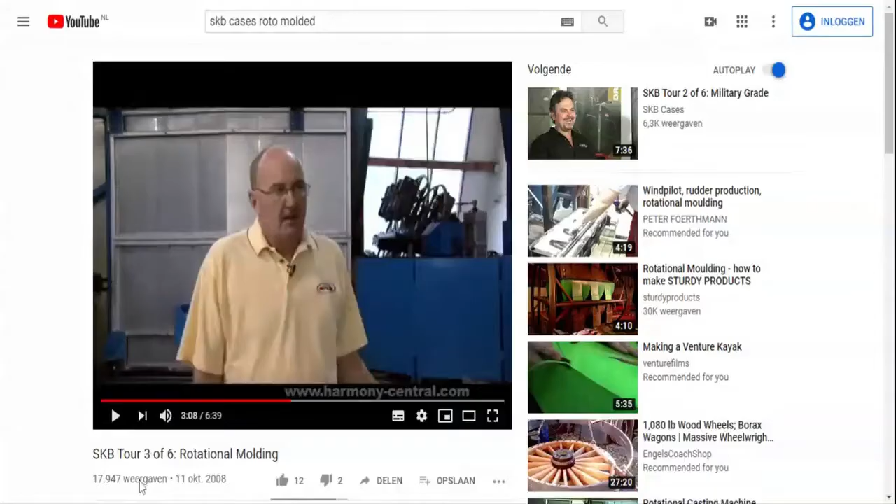So first let's take a look at roto molding. I'll try something new this webinar and incorporate a small YouTube video made by Dave Sanderson, also known as Big Dave, from SKB cases in the US, where he explains the roto molding process quite briefly. Just a second and I'll start that video.

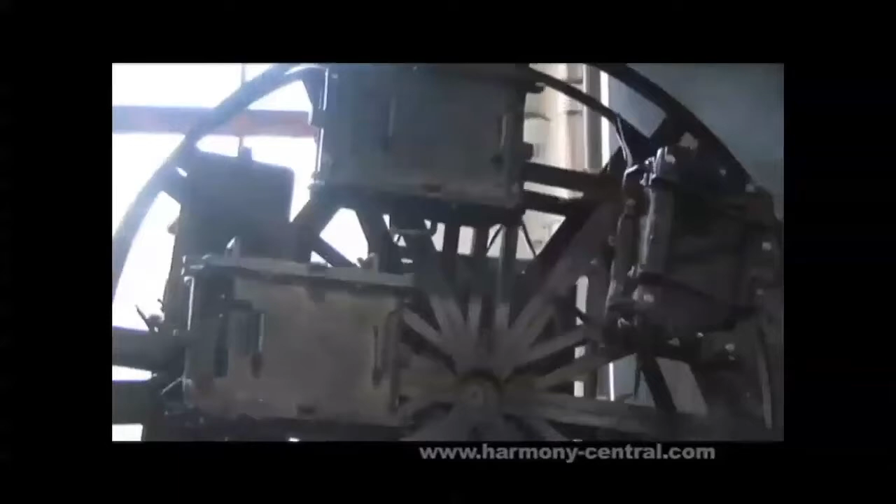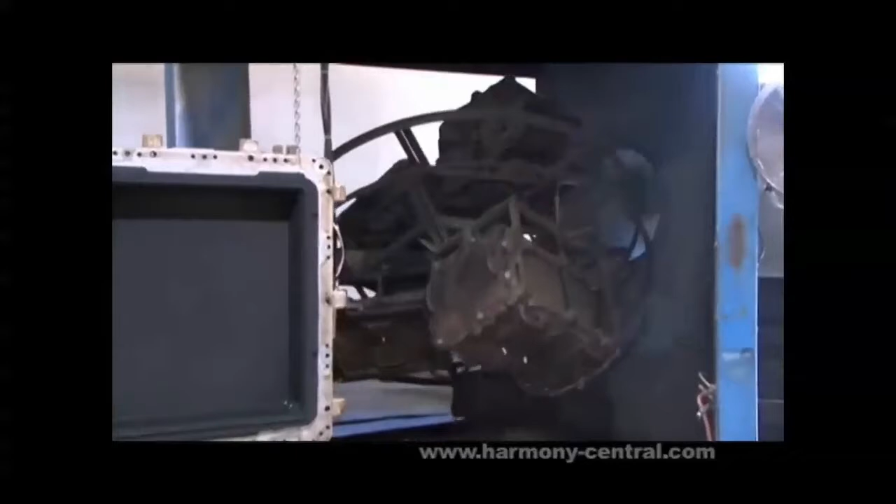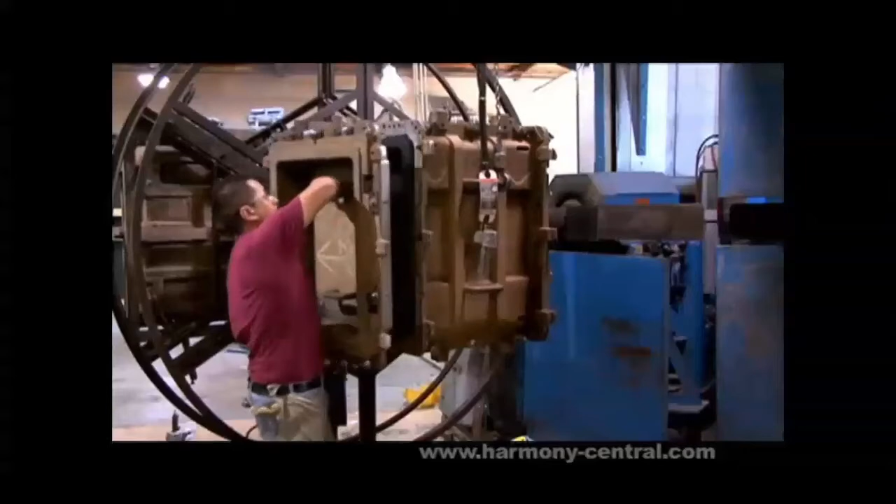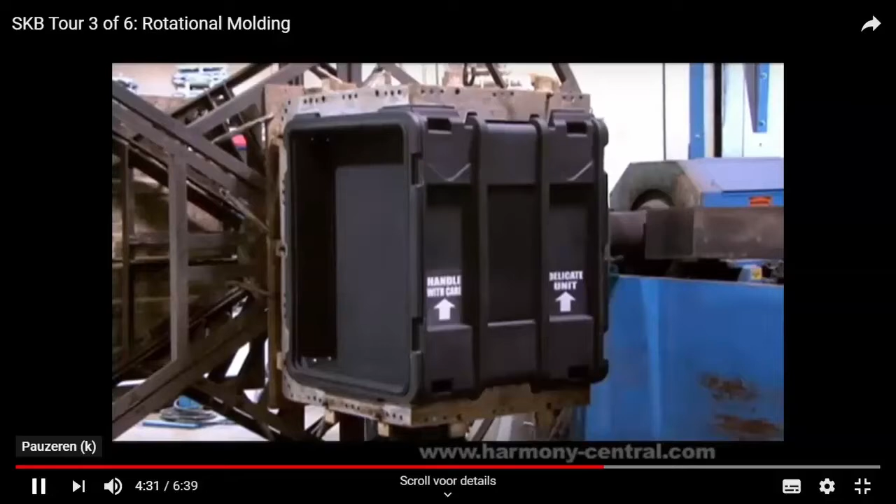This machine here is a Ferry Model 280 rotational molder. The way rotational molding works is the plastic is actually a powder. We weigh it out and bucket it into these hollow molds. They go into this big oven where the temperature is about 750 degrees, and it rolls around on 3 axes, and the plastic melts and coats the inside of the mold via gravity. Then it goes into that chamber there, which is a cooling chamber where they spray it with a fine mist of water. Finally, this is the loading and unloading station where they open the molds up, take the parts out, put the powdered plastic back in, close them up, and get ready for the oven. The cool thing about rotomolding is it's a really great way to make hollow parts, and what we at SKB have gotten really good at is making multiple piece molds that go together almost like a Chinese jigsaw puzzle, where we can accomplish the same thing they do with a wooden case without having to cut up a bunch of pieces of wood and rivet together with angle and corner pieces. So we get this unitized structure that's extremely strong, extremely lightweight.

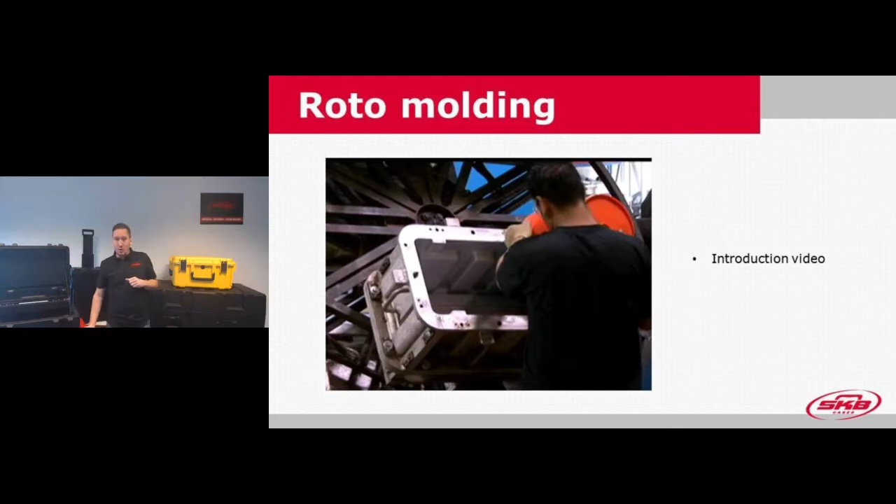So just a quick recap of the roto molding process. All our 3R boxes are rotationally molded, which is great for creating strong and impact resistant boxes. You've seen that the molds are built up like a puzzle, so they're put together before the material goes in, and afterwards the molds are taken apart when the finished product comes out. The product is made by rotating the mold on all 3 axes through an oven that's about 300 plus Celsius or 600 plus Fahrenheit, and it goes about 20-25 minutes in the oven. Afterwards it cools down, and then after a while the mold is taken apart and the product comes out. All in all, the cycle time is well over an hour to create one box.

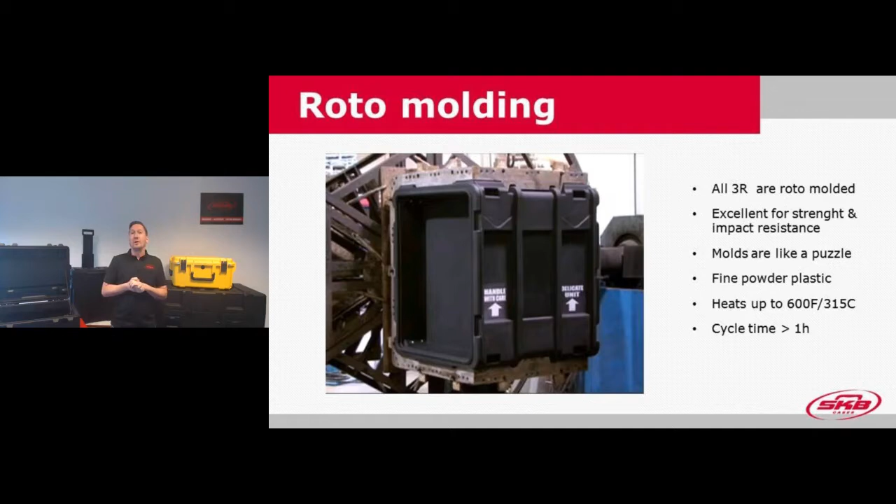What's also good about rotomolding is that it also allows you to reinforce certain parts by rotating in that direction a bit more often, reinforcing certain parts of the box.

Another good thing with rotomolding is that you can create shapes and dimensions and sizes of boxes that you can't do with injection molding, due to the fact that there is no draft angle in a mold needed to take the mold out. That's why you can make bumpers and all sorts of shapes and sizes.

The material itself has a lot of shrinkage. That's why after production, the box and the lid are put together so they shrink into a perfect size together. So that's quickly an introduction about rotomolding. If somebody has any questions, you can ask them now or later on.

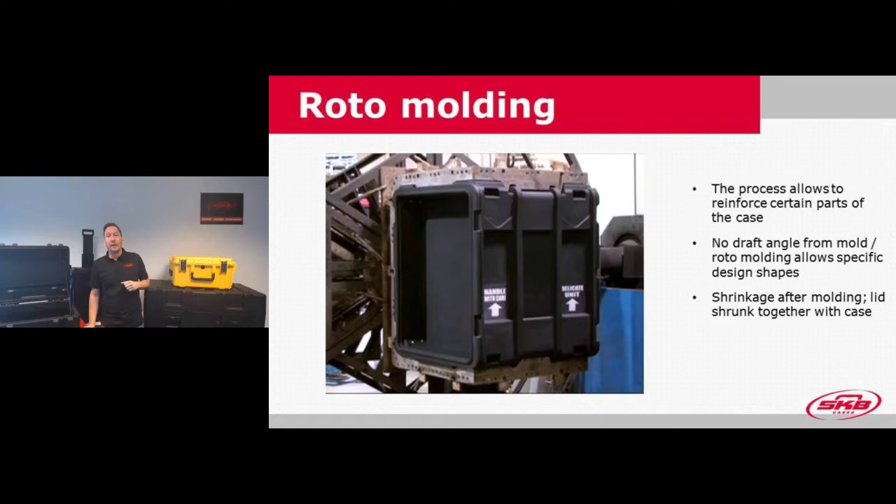So let's take a look at the material. I have a slide here that shows how fine and dusty the plastic is. All our cases are made from linear low density polyethylene, which has more or less the same characteristics as polypropylene in terms of flex and impact resistance.

And we make ours from a hot melt color compound, which is different from a cold concentrate compound because it doesn't really pollute or weaken the material. So it's a good way of creating colors.

I'll show you on camera the difference in the material. You can see how fine the powder is here compared to the grindy polypropylene material. That makes perfect sense, because if you made it with those grinds, it would take a lot longer for all the plastic to melt inside the mold while it's rotating. That's why it's made from a very fine powdery type of plastic.

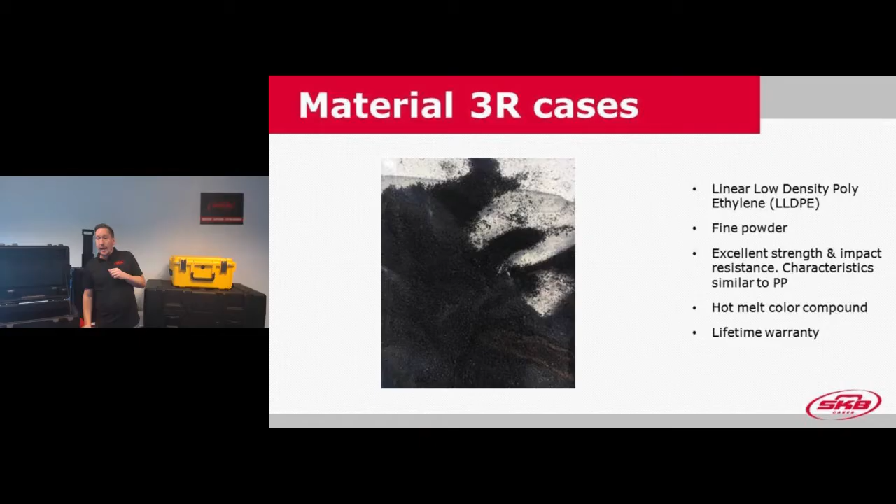Another thing we do with rotomolding is creating inmolds for later applying and mounting components like wheels, latches and hinges. You have an example on the screen - these are the type of components where we can later mount the hinges and latches, because we only have to rivet them through the holes you can see, which allows for much faster assembly.

It's also good because it ensures the water tightness of the box without having to use a watertight rivet or extra washers. Let me show you a bit better on the video how these inmolded components look - here you can see perfectly well how it's been molded into the plastic of the case.

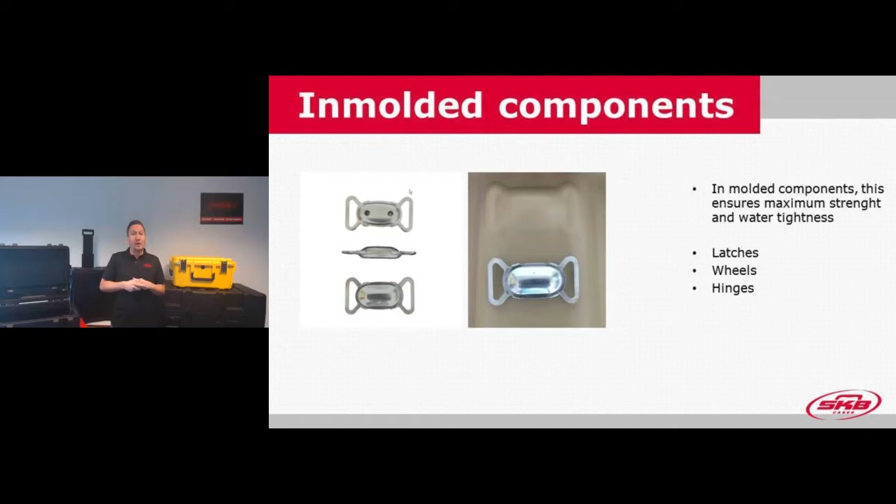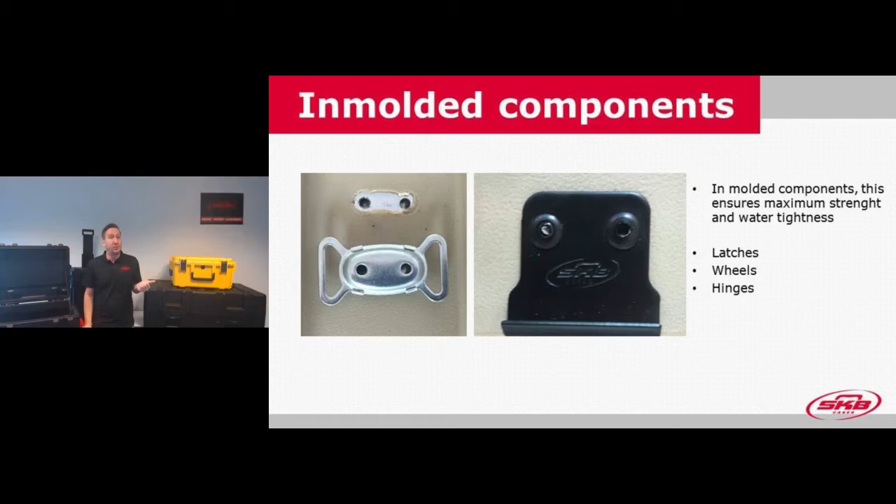These little butterfly components are for the latches and hinges. If you look at the opposite side, this is how it looks from the exterior, and it's very easy, as you can see on the right hand side, with a black component where we mount the butterfly latches on. So it's really easy for mounting them.

The same is done for the wheels - it's basically a screw thread, and I've marked a picture with an arrow showing where the component is mounted. Again, it's molded nice and neatly in the plastic. It is watertight, fixed firm and strongly, and it's very easy to screw the wheels onto the case. So that covers the rotomolding.

Now let's take a look at some other features of our 3R boxes. Let's start by looking at the difference between the 3R boxes and the I-series injection molded cases by showing you the valve difference. All injection molded I-series cases have a breather valve.

This is basically a Teflon membrane that keeps water or water molecules out, but allows air to flow freely between the inside and the outside - well actually you need a bit of pressure difference, but not to a certain level. So that's what we have, a breather valve, on the I-series.

On the rotomolded cases, we have a pressure relief valve, which works with a pressure difference between the inside and outside of the box of 1 psi, pound per square inch. As soon as there's a pressure difference, the valve opens up.

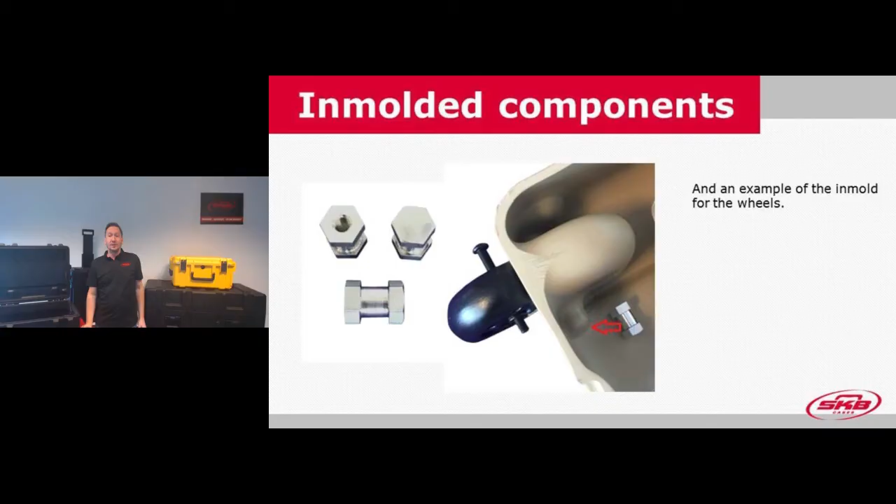I hope you can see it pretty neatly from here. You can see how it moves - basically the valve, and when there's pressure, it will open in that direction. So all of our 3R series boxes have a pressure relief valve, mounted mostly on the front of our boxes.

Keep in mind that there's a difference between the breather valve and the pressure relief valve, although most commonly they're both called pressure relief valves. Don't ask me why, it's just how it happens in practice.

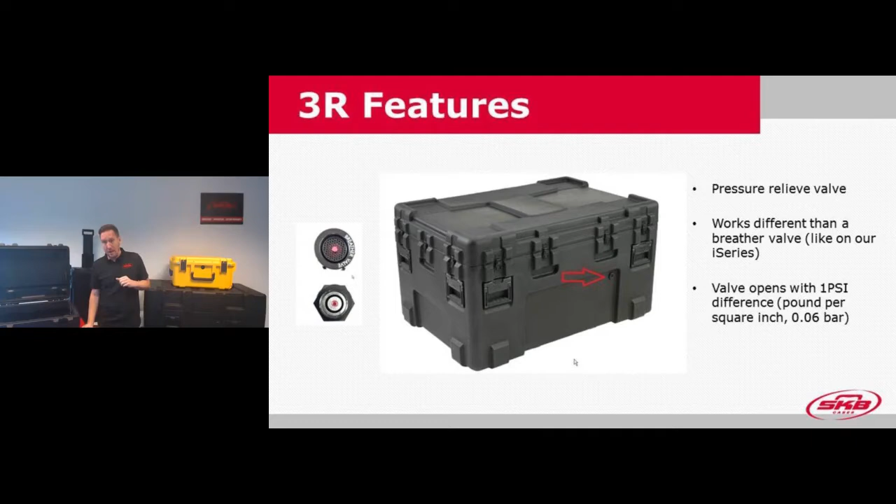So on the next slide you can see the way we also make our cases watertight. Inside the lid is a gasket, made from EPDM material with a hollow core inside. The hollow core allows for a very nice way of compressing the gasket when the male profile in the base pushes inside the female profile in the lid where the rubber gasket is mounted.

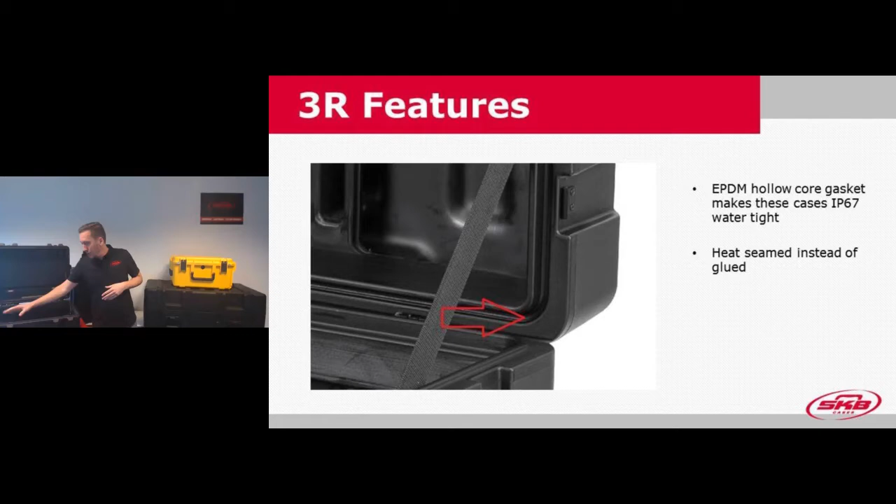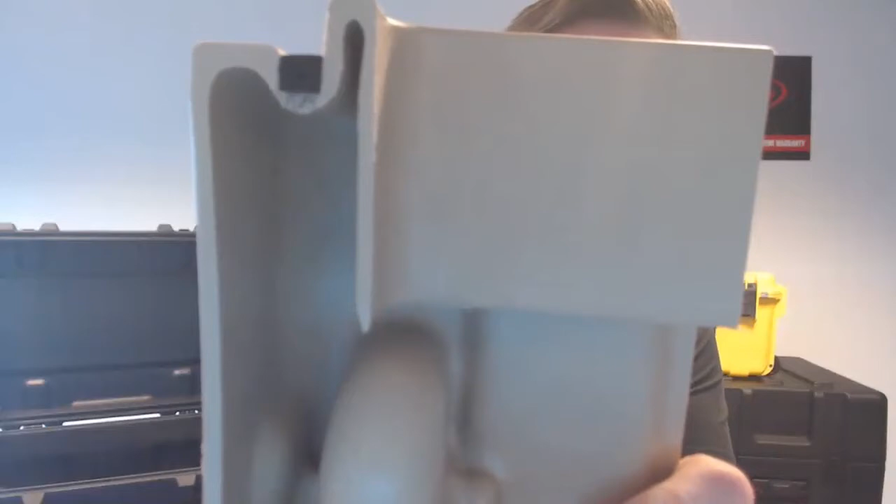I can show you the hollow core on screen so you'll hopefully be able to see it. Inside the core of the gasket, you can see it's opened with a small space, and as soon as you press the male profile and the female profile together, that allows for a neat squeezing of the gasket.

So when we move on with the features, all our latches... oh, I'm going to kick off with the handles first.

These handles are made from ABS for strength, and after that we overmold the handles with a thermoplastic elastomer for a bit more of a soft touch. All our handles are spring-loaded. Normally you can't see the back of them, but you can see here a spring inside the handle, which makes sure the handle pops down into the same position after you put the case down.

As you can see on the box and in the picture on your screen, the handles are recessed for extra durability. This case is a little lower, but here is the handle, and it's recessed within the bumpers of the case, meaning it can't take a big impact while transporting or if it's stuck behind something, and that allows for more durability in the end.

So all the other components, the latches, the wheels, and the hinges are mounted on the inside with in-molded components. The only thing that's drilled through and mounted with screws, washers, and nuts are our handles, and they're closed using a Nyloc washer on the inside, making sure they stay absolutely watertight. If you have a spare handle, we supply you with the components for mounting, including the nuts, bolts, and Nyloc washers, so it remains watertight.

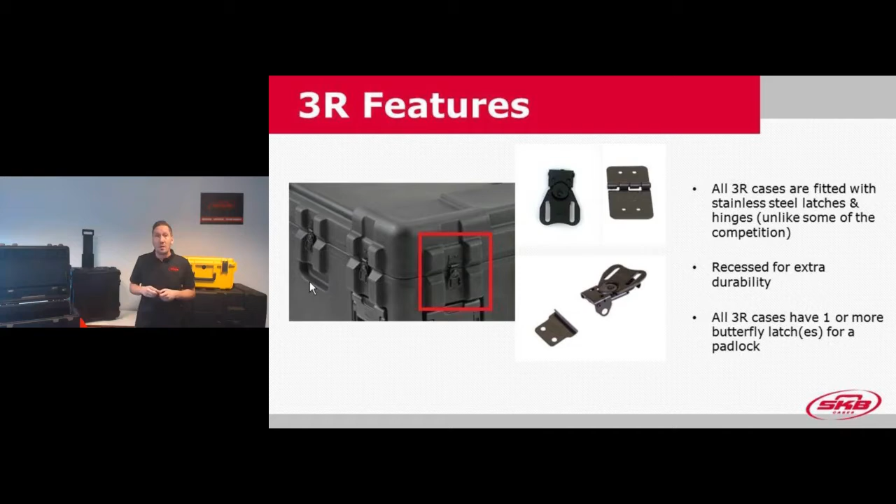With injection mold, it's fairly easy to see how the dimensions are made. With roto molding, because the shape from the mold is a bit different, and you also have one of these rims inside, the area below the surface is actually a bit wider. We always measure the internal dimensions on the top of the base of the case, so although there's a little bit more below, we always measure it here in terms of length and width, based on the smallest available dimensions of the case.

So that's for the first three pairs of digits. Now we're going to look at the letters involved in the part number, which for those who order a lot of I-series is quite familiar. The first letter behind the last two digits stands for the color, where B means black, and we have a few other options like M for olive drab, T for desert tan, and G for gray.

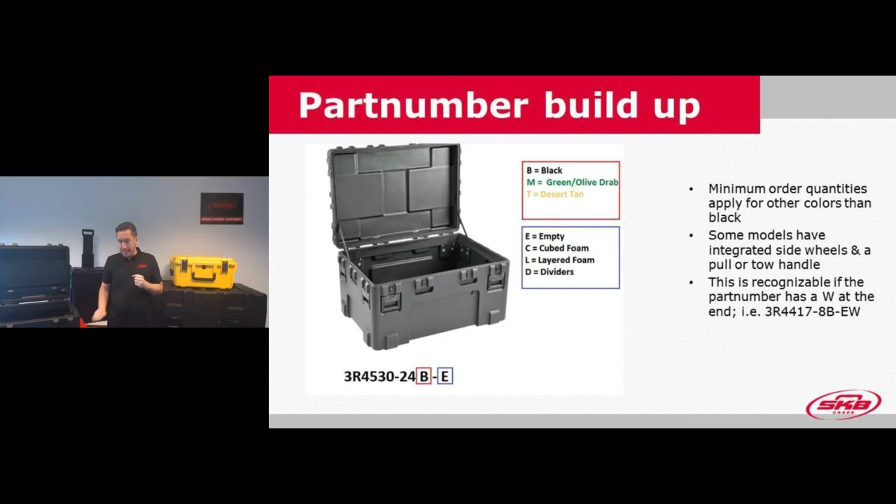Let's take a look at some of the accessories we have for the roto molded boxes. We have, for instance, the TSA padlocks, like I previously showed you, for closing the butterfly latches, so no unwanted person or staff can get inside the box.

We have the forklift riser kit, which is very convenient if you have a big box with lots of weight inside and you want to move it with a pallet or even a forklift truck. You can just mount these on all four corners, and it's very easy to lift with a forklift or pallet cart.

That one takes quite a bit of work, and we have a demonstration available on exactly where to mount them on the side of the boxes, but it involves some cutting and drilling. We have a really good tutorial for that, but it will take you 45 minutes to an hour to mount the edge wheels on one of your R-series boxes.

Another one we have, which comes with rivets, is a ship label plate to mount on the 3R series boxes. You just have to drill four holes and basically pop rivet the ship label plate onto the box.